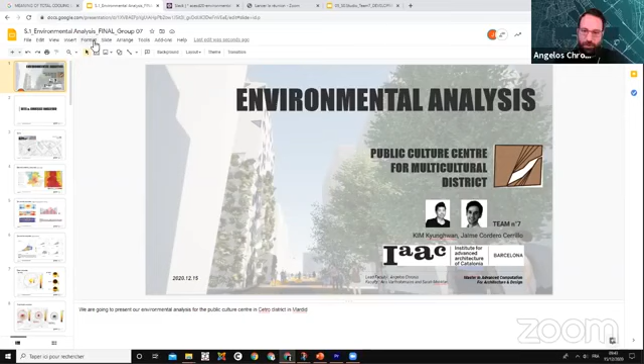Hi, so we are team 7, Kim and Jaime, and we are going to present the environmental analysis that we have done for designing a public center in Madrid.

This is our site, located in the city center of Madrid between La Latina and Lavapiés neighborhoods. As we already know, Madrid, like every other big city, has a problem with heat islands, which produce increasing temperatures. So this is something to be considered for our analysis and design.

We started doing a climatic analysis, and we could see that there is a really hot and dry summer and a slightly cold but quite humid winter. We also did some comfort analysis, which showed us that during all seasons there are some comfort days, summer having the most of them. But we saw that it would be really important to have a cooling system during that season.

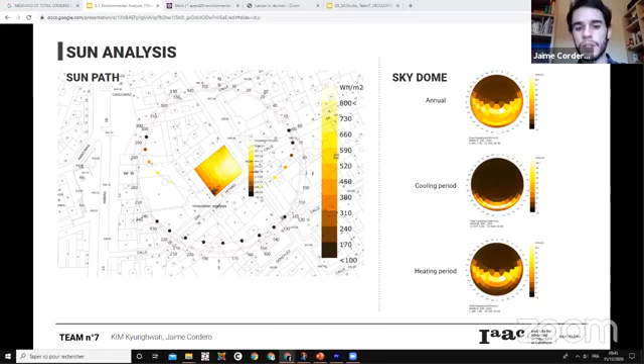With the radiation analysis, we saw that there is a quite proportional high radiation distribution on all our site, with the bottom left corner receiving a bit less radiation. That radiation comes mostly from direct radiation, as the site is facing southeast. Through this environmental analysis, we understood that our site receives high radiation, especially on the upper corner, and that radiation is an important factor to be considered in our design.

That's why we asked ourselves how solar analysis can define architectural building and facade design, and also interior comfort, within other key factors of conception.

To be able to answer this question and optimize our project, we used several tools. We started with PedSim, Ladybug and Honeybee, and Pachyderm or Snail for the analysis. Then we continued using Ladybug for optimizing radiation through Wallacei. And at the very end, also Ladybug and Honeybee for the facade design, for daylight and energy consumption analysis, and also as decision makers.

As we have seen, mainly the environmental problem we have to face is high radiation and high temperatures, and dry weather in summer, which we take as input parameters for our project, with sun direction, radiation, and building orientation.

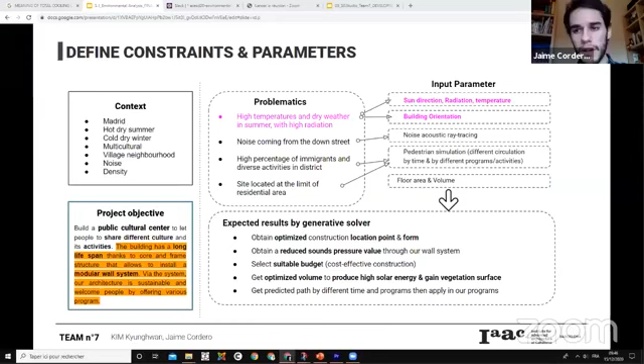Before the design and optimization phase, we did some initial mass studies through radiation and also energy consumption. And we saw that due to the shading one building could produce onto another, we didn't have such big values of cooling load.

So I'm going to present optimization and our strategy to combine data. We tested several optimizations. This is our final optimization based on our context and site analysis.

Our goal was to optimize the model with a maximized floor, and then minimize the radiation, along with other factors. So this is the result that we selected, which was on the average for all the fitness values. And this is how our final mass looks like.

With circulation in the middle, but also there is a small building on the street block for solar radiation, for a big building inside.

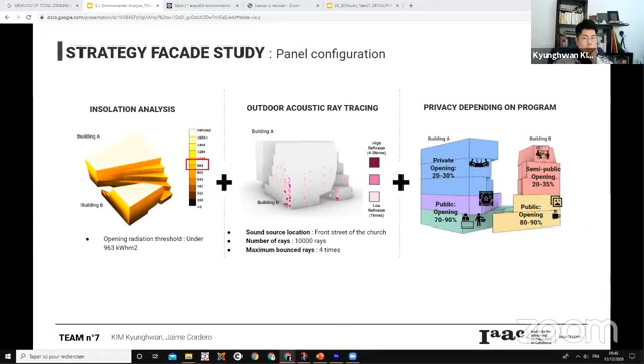The strategy for our facade design is that we use insolation analysis and acoustic ray tracing data, but we also gave openings by different percentages, depending on the program.

To explain our methodology to integrate all output data for facade design, we use the case of building A. With the triangle mesh model, also used for the solar radiation analysis, we tested to find out the radiation threshold for openings. We got a threshold of 60% of facade where it receives mid and high radiation, and 40% for mid-low radiation areas.

Then the second variation for opening and closed panels is related to program and privacy, as you can see in the blue and gray images. As the percent value is increased, more windows are created. For example, for closed panels, the higher percent we have, the fewer closed panels, for the ground and first floor, where the public spaces are.

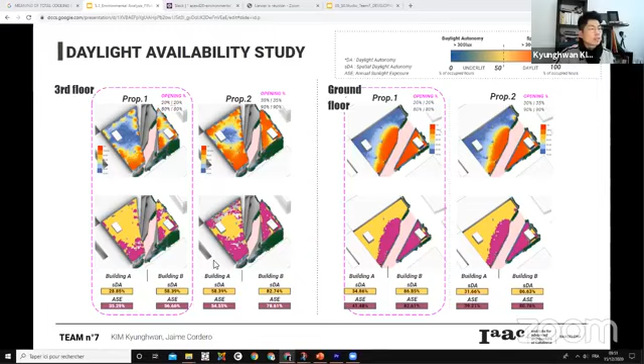And also we did an energy consumption test. The total cooling and heating load: the cooling load is less than proposition 2, so this is better than that one, but the total heating load is higher than proposition 2. So this is a little problematic in the end.

So we have to test our openings, and during the summer they have quite good daylight value. So this is the final view.

Unfortunately, we have a technical problem this morning, so the video hasn't finished yet.

Yeah, thank you. Thank you.

So, comments from the jury. Where do we start? I can't see raised hands and things like that, but we can see the video actually, not the environmental one.

Comments from the jury. You don't want me to pick names, so maybe you start. No one? Theodore, any comments? Yeah, I was just waiting to see if anyone would go first.

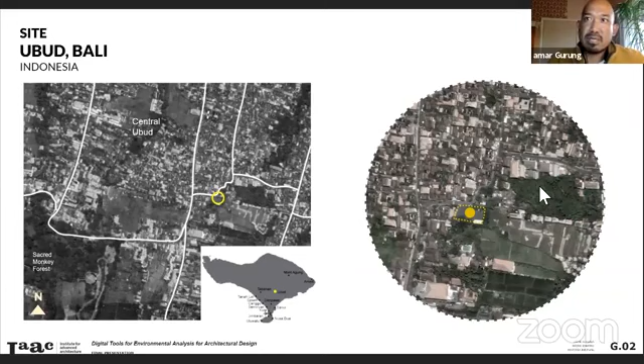Being located near the equator, Bali has a warm tropical climate with year-round temperatures averaging 27 degrees Celsius and a humidity level of about 85 to 90%. There are two seasons in Bali: the dry season between May and September, and the wet season between October and April.

The driest months are also the coolest months. Between January and March, winds coming from the west are powerful and gusty, whereas between June and September, winds from the east are consistent but not strong. Hence, this is also the kite flying season in Bali.

The difference in total radiation levels does not change much between the two seasons. Radiation levels remain consistent but high. Naturally, there is more diffused radiation in the wet season than the dry season. Similarly, the vertical angle of the sun does not change much between wet and dry months - the sun is mostly overhead all year round.

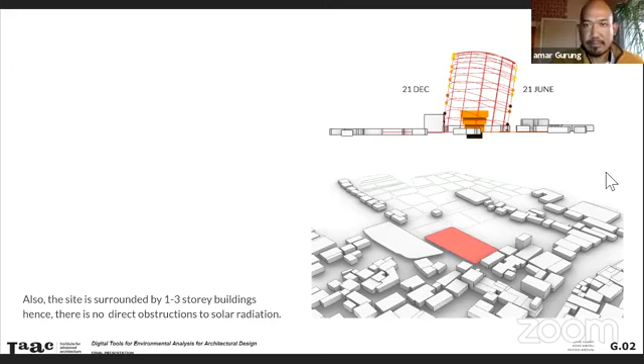The site we've chosen is surrounded mainly by small 1, 2, or 3-story buildings, so there is no direct obstruction to radiation on the site. In conclusion, there is high solar radiation all year round, so proper shading should be provided. Monsoon season has extremely high humidity, which creates discomfort especially when temperatures are also very high. There is a good amount of wind all year round, so it should be utilized for natural ventilation and stack effect.

We started with the research question: can we create opportunities from the climate by harvesting solar and wind energy from the environment, decreasing reliance on energy produced by fossil fuel, and at the same time create indoor and outdoor space that is comfortable?

Our objectives and methods are self-shading the building to reduce heat inside, creating openings that allow cross ventilation, determining how much solar energy can be harvested, and creating comfortable outdoor spaces sheltered from rain, wind, and sun.

We started with quick tests at the beginning of the course to see the position of the building and how the building affects the site, or how the site affects the building, regarding total radiation and different levels. Since there is no obstruction from the sun path on the site, we concluded that it does not affect the total radiation.

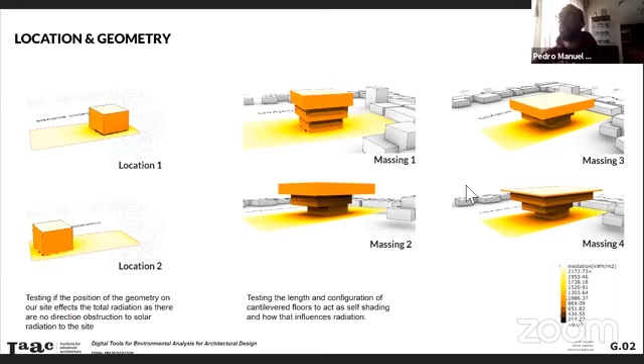The second test, shown more on the right, we started with a larger roof that can increase solar radiation on top to harvest sun energy, but also use staggered volumes to act as a self-shading device. Both worked well, so we decided to move forward with our final geometry concept.

We derived this geometry from Wallacei, giving three parameters: first, maximizing solar radiation on the upper surface to position solar panels; second, maximizing shading or self-shading; and third, maintaining a geometry of the volume.

We then went on to test different massing surfaces, asking ourselves two questions: can we optimize the mass for solar radiation without compromising the bamboo-related design? Because bamboo is the material we are going to use in this project based in Bali. And how much energy can that provide to the building?

We went through three steps: from the first test of Wallacei to the second test which gave us this edged geometry, then to the third one which we smoothened out to be suitable for bamboo construction. Looking at the numbers and other drivers of our project, like the bamboo construction, the numbers don't differ too much from Wallacei 1 to the smoothed Wallacei 2.

So we decided to have this sustainable material and to go on with this value of total radiation that we could achieve with Wallacei number 2. And then we started to look at the efficiency of a solar panel, which is 15 to 22% that we can have now.

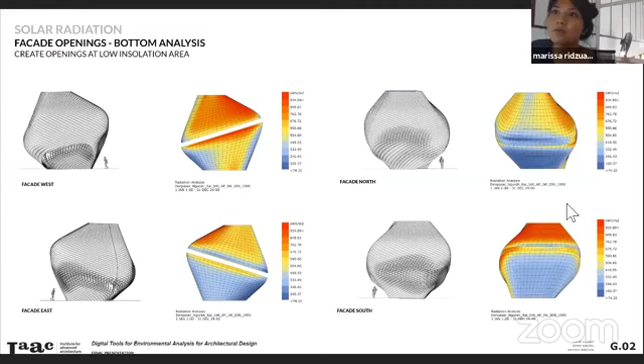And then we looked at it from top, and now we're looking at it from the bottom, which is mainly low insolation. And here we see that there's opportunities to create the openings for entry and for operable windows. That's how we derive where the location of openings are.

And then we looked at the skin design and these scales that we have on the building, testing different rotations and seeing if we can increase it even more.

So in the end, we went from this flat building skin to something that is angled for optimal insolation and also to create these openings. And we have achieved increased insolation.

And then we had a look at the cross ventilation. The east side of the building, the site has no adjacent building, so it gives a big amount of wind flow, and so that is a potential for cross ventilation. Whereas the west side that has 2 to 3 story buildings is protected quite considerably.

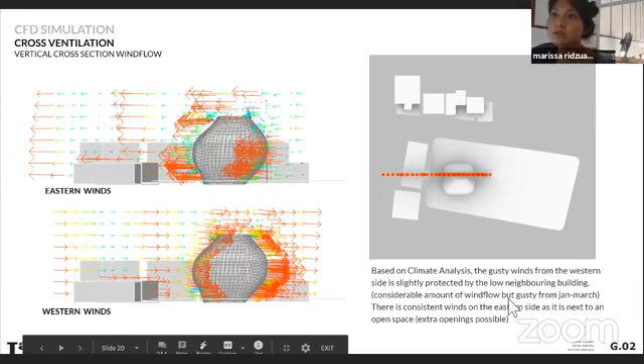There is consistent wind on the eastern side as it is next to an open space, so extra openings are also possible here.

And then we looked at aggregating. The intention of this aggregation is to create a courtyard that can be shared by these 3 buildings. So in aggregation 1, we managed to create a small courtyard of comfortable wind speed.

And then we tried aggregation 2, which has the module on the south side, using the existing building to shield on the north and west side. Aggregation 2 clearly provides a bigger area of comfortable wind flow in the courtyard area.

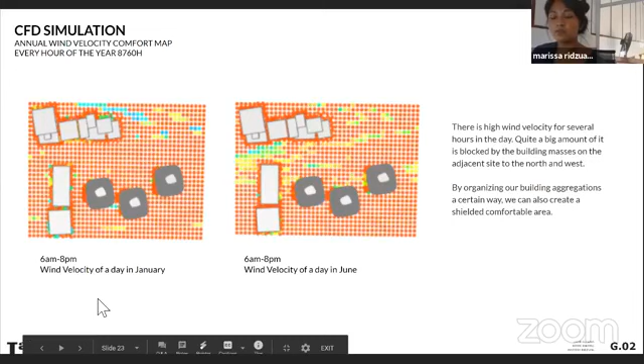And this is a simulation from 6 a.m. to 8 p.m. on 2 days, winter and summer solstice. By organizing our building aggregations in a certain way, we can create this shielded, comfortable area.

And then the solar adjusted temperature, the MRT, sun exposed versus sun shaded - obviously in a tropical country, sun exposed will be unbearable in the midday. And so we needed a strategy for the shading.

And so we looked at shadow studies, important times of the day, 8 a.m. to 6 p.m. on summer and winter solstice, and determined where we need to shade the area, which is in red. By doing the thermal comfort analysis of the average week of the year, we can confirm that we do need to really well shade this courtyard to create a comfortable open space.

And so our strategy for that is a very simple landscaping strategy, using big tropical trees such as the banyan tree in the areas where we need the most shading, and some other smaller canopy trees in the areas.

Yeah, and what do you want to talk about this one?

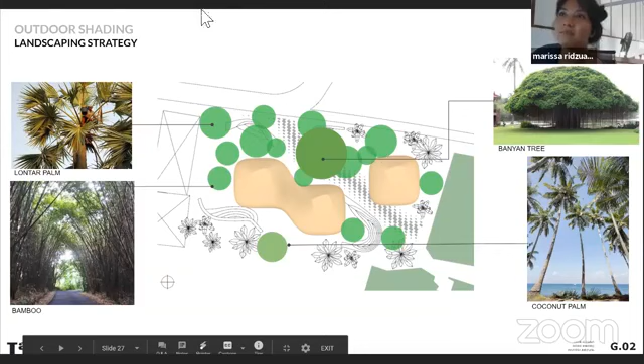Yep, and I think another consideration that we haven't really elaborated on was also the natural ventilation. So I think the form of our building is also well suited for stack effect to further enhance the natural ventilation within our building. This section also shows how that sort of works within our building.

And I think that's the end of our presentation. Thank you. And I just like to add a little bit to what Amar just said.

I think based off of a lot of our comments with the tutors, that this strategy of solar radiation will create a lot of heat, and it's only natural that we use it again to create that airflow across the building. So this is why we have this last slide to remind us that absorbing solar energy will also create heat, and we will have to find a way to solve that problem. Yeah, I think that's all.

Thank you, guys. I think you have to stop here because you're a little bit over time. So let's go to the jury for comments. Very briefly, it has to be a little bit briefer than before because the presentation ran over a little bit. Matilda, do you want to start? I have you first in the order, or anybody else, actually, it doesn't matter, don't worry.

I just had 2 points of reflection. Again, I'm probably the least technical jury here. So one of the things is actually something that I have from my experience in Indonesia, related to the luminosity. I know that in tropical climates, the light quality or the quality of light that you have is very different, for example, with respect to what I was used to in Australia. And so I was wondering if that is something, I saw you did a daylight analysis, but by the design, which is very sheltering, I was wondering if you had taken into account the possibility to analyze the quality of light within the building.

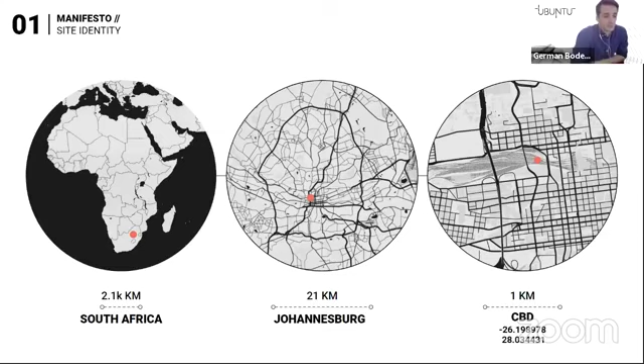Our site is located in the southern hemisphere, in South Africa, in the city of Johannesburg, more particularly in the CBD, the central business district. Something to notice about the CBD is that it's in a segregated city due to apartheid, and this particular site has been divided by a 75-year-old railway infrastructure, as you can see. On the right image, we got almost 30% open land, and that open land is not related to urban and green parks, but to how much the train occupies and creates, as you can see on the left image.

Now we'll pass on to my colleague Andrea to talk about the weather analysis. Thank you, German. After we ran several analyses, we learned that the temperature is very comfortable, relatively comfortable in Johannesburg all year round, and the change is not too visible or drastic throughout the year. I'd like to remind you that summer is winter in Johannesburg and vice versa. We also ran some humidity analysis and saw that it's comfortably dry. The most humid month is February, and we have a dry period from June to July. Overall it's quite comfortable all year round, and the average yearly cool comfort factor is 0.417, which is very close to 0, the optimal comfort.

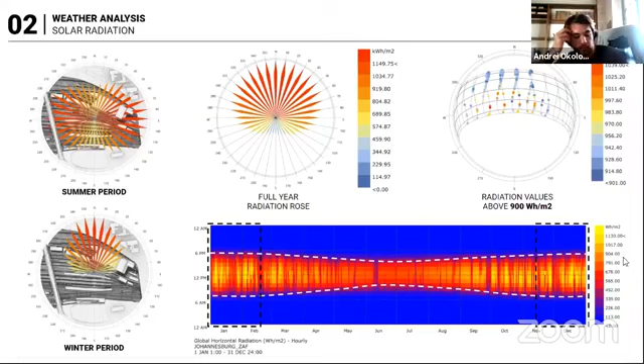On a more important note, solar radiation is a factor we had to consider more, as you'll see in the next slide. Especially in summer, when radiation numbers reach up to 1,000 watts per square meter. In the next slide you can see we've done some macro analysis of solar radiation, and considering that our site is an open field of rails, it receives more than 13 hours of sun a day, considering there's no shade.

I'll pass it back to German to talk about the design process. As a conclusion to the analysis, we understood that both radiation and wind are factors we need to use when considering how we design the bridge and how we connect it. So we then started a design process: a pedestrian bridge that connects north and south. What we did is take all the selected sites and identify the interstitial voids along the railways, which we can actually use to place our supports.

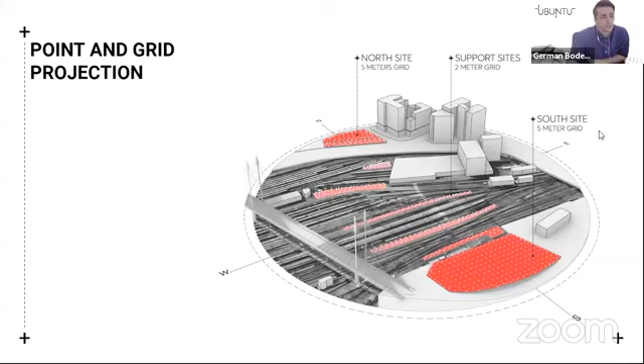We then cast up grids of points, and using a genetic optimization algorithm, we started looking for the optimized path connection. We used 4 different goals.

The first goal is to reduce the travel distance in order to create the quickest connection between A to B. Goals 2 and 3, we analyzed both the entry and exit slope in order to create a wheelchair and bike-friendly route.

4th and most importantly, in each iteration we measured the amount of radiation in order to choose the one that absorbs the least amount. This then takes us to a final solution.

For the final solution, we did further analysis and testing on both sun hours and radiation. As we expected, we can see a huge amount of radiation on the bridge that spans north and south. We got an average of up to 12 hours on the bridge.

So we also further analyzed both winter and summer. In winter, our average sun hours decreased, but in summer, based on Johannesburg at 1,600 meters above sea level, these values and hours for radiation are extremely harmful for the skin.

So the question for us was how can we create a pedestrian bridge that grows a protective skin on the areas we want to host program. This bridge hosts particular programs on the area highlighted, as you can see on the top right image.

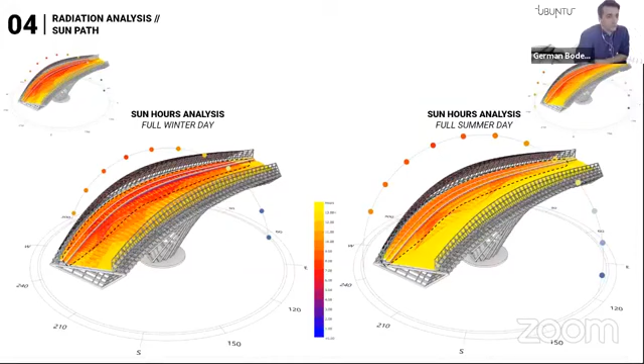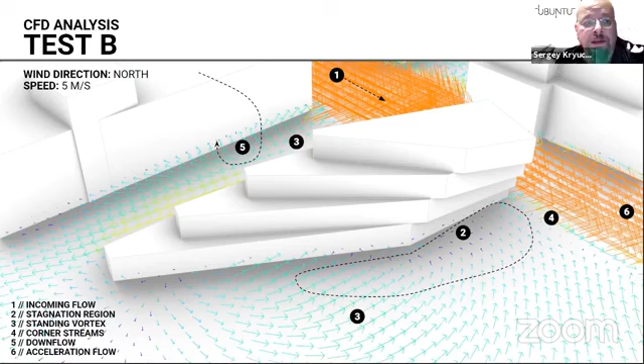There is a bigger scale simulation where we see the calm zone, so we located our leg wrapping around it so that we could create a kind of urban plaza next to it. And here it is with the actual bridge model.

The location of the bridge and its orientation from north to south, which did help us in terms of wind, also makes it not exactly comfortable in terms of sun, because we can protect it only from one side, which solves only part of the problem.

To improve the situation, we planted a few trees in the middle of the bridge, but only in those spots where we have the leg, because obviously we can't plant trees along the whole span of the bridge. With all the design constraints, this is what we arrived at.

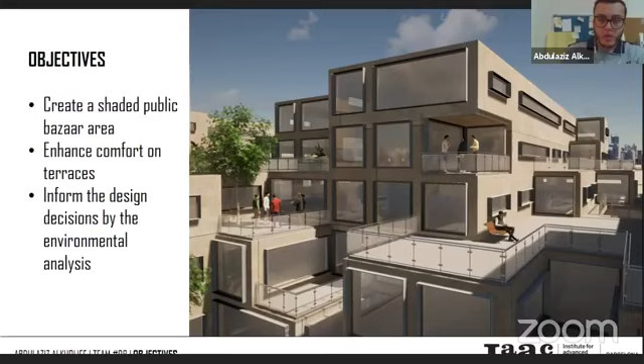My objectives are to create a shaded public bazaar area and enhance comfort on terraces for the students there, and inform the design decisions by the environmental analysis, as will be shown in the next slides.

First of all, we have the chart of the hourly dry bulb temperature. I'm trying to see the hottest period in our climate, that exceeds more than 30 degrees, showing 38% of all the year above 30 degrees.

Now for the wind, same strategy to show the wind speed, showing 80% of the year less than 5 meters per second. The third parameter is humidity, so I'm trying to find the amount above 20% per year in Riyadh, which gets a result of 43% for all the year.

Now I'm trying to find, per the hottest period, which is between May and September, and again between 8 a.m. up to 8 p.m., when I combine some factors or influences like temperature, wind, or humidity. It shows that when temperature exceeds 30 degrees and wind speed is less than 5 meters per second, it's 27% per year.

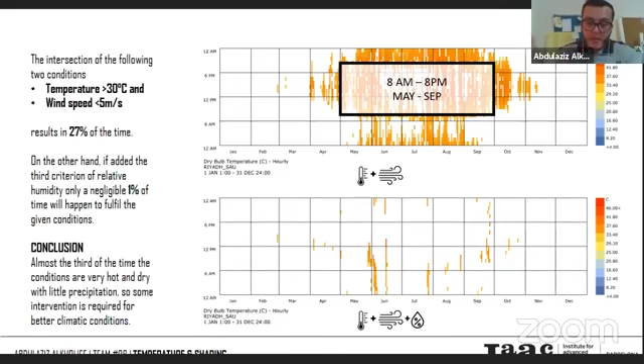So I want to focus on that, because it's a coffee shop, and I want to try to explore and find a solution there. I focus there and try to add shades to explore. I'm not really sure if it's possible or useful.

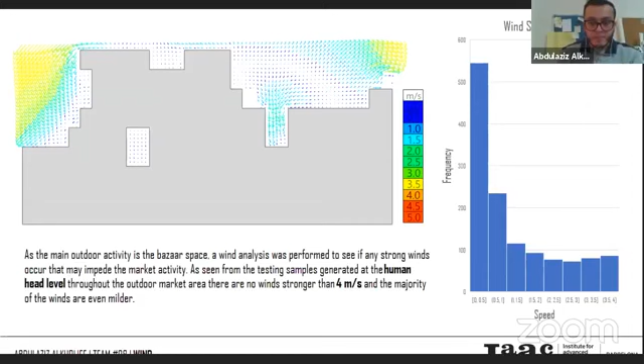Now I'm trying to show the wind races through the terraces and capsules in my building, and it shows the same result, mostly in the domain between 0 and 0.5, but nothing more than 4 meters per second.

These are my activities or zone categories in the building. Depending on the activities, I change the pattern of the capsules or their sizes, and generate the openings for all of them. Now it becomes the same, let's say, offset.

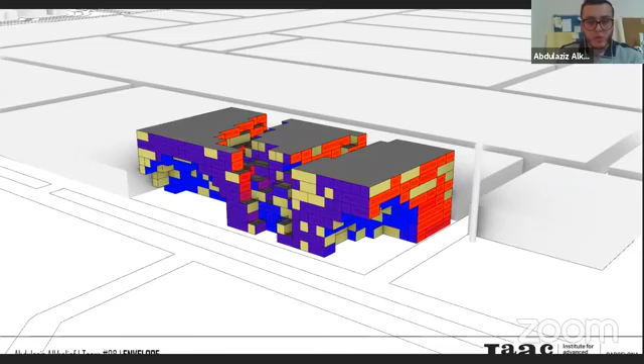Now I just see again that the sunlight becomes with my faces, and we notice that the purple one which is in the north side, and the blue one which is already shaded by the cantilevered floors, it's become blue. On the other hand, in the west side, it's become red, or let's say some of them become maroon. Depending on that, it's become an inverse relationship between the faces and the sun rays on our facades.

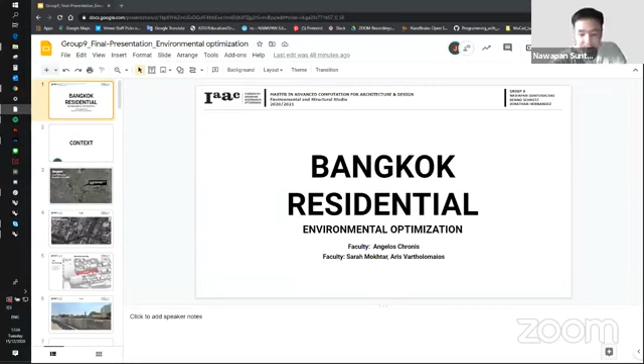We are group number 9: Nawapan, Jonathan, and me, Benno. We're presenting a Bangkok residential project today, meaning the program is residential.

We found a plot. It's a large plot for a residential program, 135 by 73 meters.

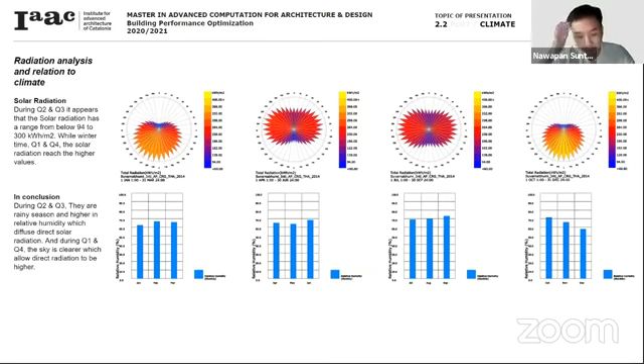Related to the season, the interesting thing is that during the winter time there is more radiation than in the summer. This is because of the cloud density, which we can see on the humidity bar below. We guess that during the rainy season, it could help diffuse the direct sunlight and solar radiation from the sky.

According to the relative humidity, around three-quarters of the year, from January to October, wind direction mostly flows from the south side, which brings humidity from the sea—this is known as the summer monsoon. Meanwhile, during the last period of the year, the wind moves from the north or the mountain part, bringing cooler air called the winter monsoon.

Another issue is the flooding problem. The common period of flooding is between September and October, at the end of the summer monsoon and rainy season. Also, the direction of the sun makes a major impact on increasing air temperature and the heat island effect.

The more perpendicular the angle is, the more the temperature increases. Unlike European cities, Bangkok is a tropical country where people normally avoid facing directly into the sunlight—it could easily burn human skin within an hour. So living under a shading area would be a suggestion, and this issue will be developed further in our design principle.

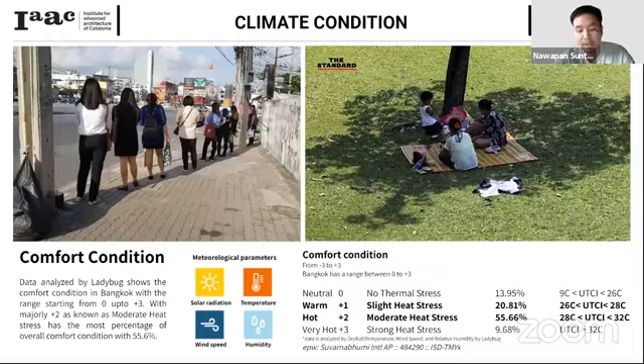For architecture and engineering, we investigated how the climate relates to social activity, and found that 30% of housing energy consumption comes from air conditioning operation. As one of the densest cities, Bangkok doesn't have many parks or forests to reduce the heat island effect—so to say, 90% of buildings need air conditioning to cool down the interior air temperature.

So we would like to propose a strategy to help reduce temperature and protect the building, according to the data we have. With the idea of a passive cooling strategy, Thai vernacular architecture will be our model role for our case study. We thought perhaps we could turn our problem into an opportunity to design a strategy mainly focusing on passive cooling. We expect the goal will achieve results including temperature reduction, less solar radiation, and maximized ventilation with a passive system.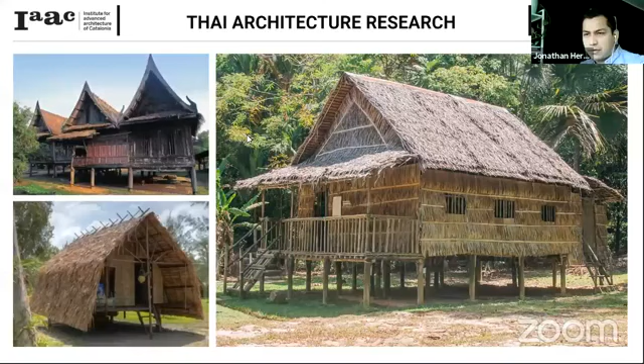And Jonathan will continue on this. So we try to extract the main principles from the vernacular architecture. And next, we'll see the most important principles.

If we start from the ground level, there's this principle to elevate the building in order to increase ventilation. We have external shading systems, a jetted roof, and a slope roof in order to increase the cross ventilation. We also have a timber structure and bamboo for cladding.

So we had the question how to integrate these principles into our design. For our form optimization, we tried to include all of them, but we started with the regulation. We set a parameter of 6 meters to set back, then we set a parameter for the height limit of 24 meters.

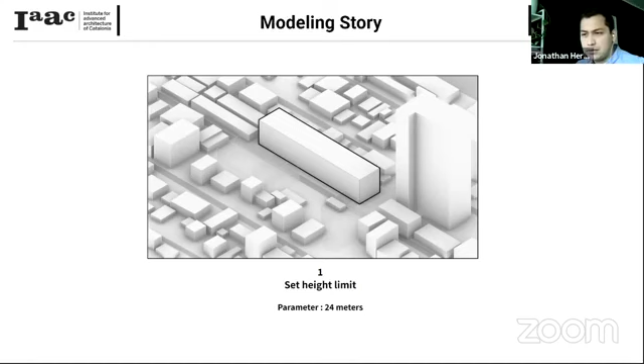Then we use this box-in-box concept to insert a volume inside in order to have an external skin, to increase the ventilation, and we also set back the ground facade to avoid the direct sun and to create self-shading.

And we opened the ground floor, from the vernacular architecture strategy, in order to have this cross ventilation. And we integrated 3 different vertical atriums in order to make the airflow through the building, through the common areas and the corridors. We created a roof slope strategy and oriented this roof towards the wind direction from the south.

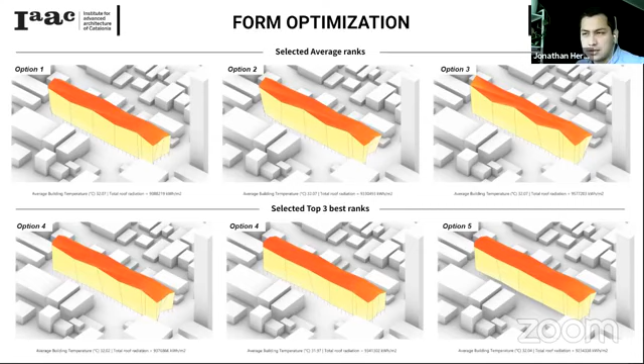The result is an integrated wind strategy in the building. We ran our optimization process with Wallacei and selected the average options and the top best.

We have here a comparison between our best 6 options, and we took number 5 since it has the lowest inner temperature and the lowest roof solar radiation.

And what we managed to do was decrease the temperature of the building. The typical mean building surface temperature in Bangkok is around 35 degrees Celsius, and we reduced it to around 31.97 degrees. After we got the results, we started wondering how we can design and define the location of the opening on the facade, and what would be an input for our data.

So in this stage, we start thinking about how we can locate and create the opening on the facade. So we look at the wind pressure on the facade surface to see where is the most possibility of the wind to flow or enter through the building.

We mapped out 8 directions of possible wind that create pressure on the facade surfaces. To use this data, we overlaid the wind pressure of 8 different directions and implemented a pattern of openings according to the pressure value happening on the facade, where the max pressure in red are the most opening area, and the minimum pressure in blue will be the least opening.

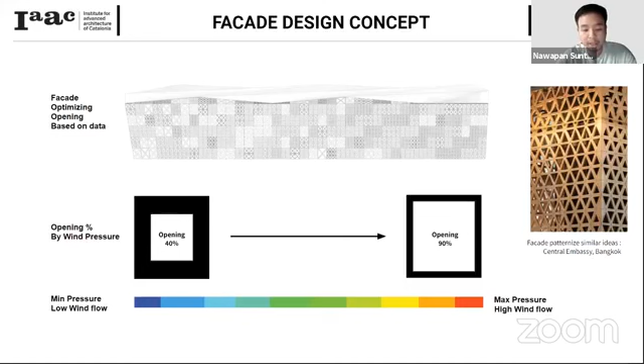And also solar radiation will take part as a self-shading strategy. That is to say, the solar radiation will subdivide the diagrid to increase the self-shading system, and the wind pressure will minimize and maximize facade opening, which we set according to the daylight factor.

We analyzed the overall facade for daylight factor to understand how we can set the minimum opening requirement for our facade to provide sufficient light. We found that with 40% openings, the interior space will have a daylight factor between 4 and 5, which means during the day the indoor space doesn't need to use artificial light.

In parallel, the section diagram shows the cross ventilation from the southeast to the northwest, where the indoor hot air can flow up to the roof through the porosity of the atrium structure before moving out of the building. This is measuring the result of our strategy and the facade radiation.

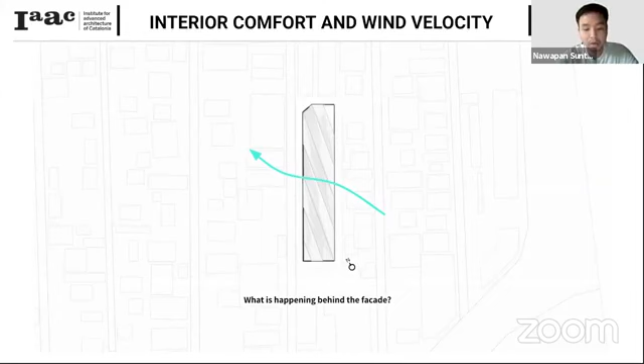And lastly, we are questioning what is happening behind the facade. So in order to consider cross ventilation and how the wind has an impact inside the indoor space, we look at the wind speed on the empty floor and analyze the area where it could achieve comfort according to the Lawson criteria. We found that the indoor space has different values in different directions as wind flows through the facade.

And we end up with a strategy about using the wind velocity behavior to define the program within the space. We believe this data will help improve our design in terms of programs and circulation in further process.

So as a conclusion, we have achieved 3 optimal results, including reduced building temperature, created cross ventilation, and apart from simulation, we succeeded in using structural elements with carbon neutral based material.

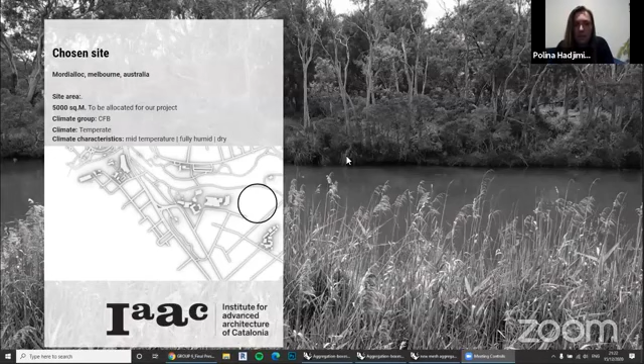Our project is located in a residential area, suburban residential area in Melbourne. It is close to a park and a river, and our closest neighbors are a campus of a college and primary school, and a lot of residential housing development. So our program is basically fitting in the context. We are doing residential apartments, and we also have a commercial part. So it's a mixed-use building.

Our commercial part will be a cafe, and because we wanted it to be automated with a lot of robots, we've allowed for quite a big back of house or service area. So the main concept of the building is to be a link for the neighborhood with the park. We wanted to create some sort of inviting volume that people can go through so that they can reach the park.

In terms of aims, we wanted to explore prefab and create a modular system driven by one core part that can work both horizontally and vertically, with modules that can work both horizontally and vertically. We've used structural optimization to define those parts, and we also wanted to optimize for solar gains.

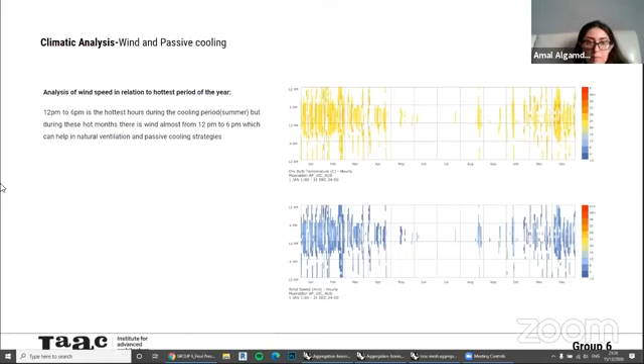It's changing the slide. I'll be changing the slides, just tell me. Amal, can you hear us? Yes, continue. So basically, we generated the wind diagrams to look at where the winds are coming to our site.

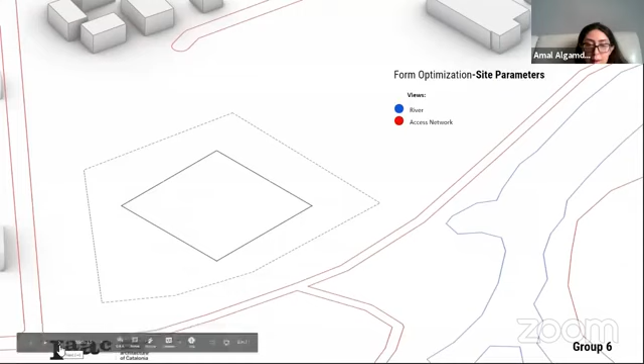So basically, for form optimization, we started with buildable area based on regulation, 40% of total land area. Then we constrained our volume based on site parameters. The height limit is 15, according to adjacent building average.

So we used voxelization and we used linear attractor to populate our volume. Our voxel size is 3 by 6. This is the module that we are testing.

In iteration 1, we had direct sunlight to our building and no self-shading. So we decided to change the linear attractor rules and rotate our building. In iteration 2, we have less direct sunlight and more self-shading.

Based on our access points, we wanted to define our ground floor plan, and we uplifted for cross ventilation and wind flow. That also affected our interior circulation and vertical atrium for vertical ventilation.

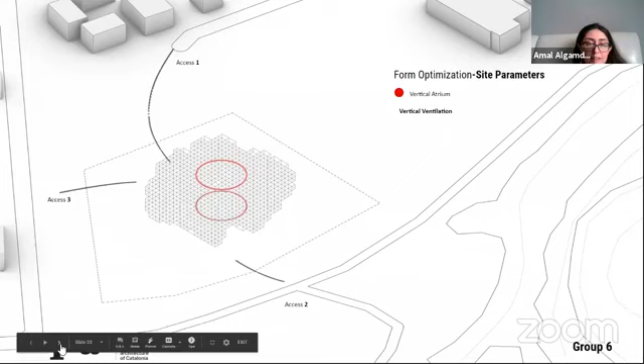So this is our optimized volume. And this is our program, where we have the commercial, residential, and services at the back where we don't need that much sun.

For solar radiation analysis, we have done an annual study in heating and cooling. We noticed that we have minimized the roof surfaces and minimized the direct solar radiation. But there is also potential for generating energy from our roof by integrating solar panel systems on the roof.

So basically, as a modular system, we decided to focus on a cluster on the north facade where the solar radiation is the most. From that, we generated our daylight strategy. We have the variables, which are opening specifications and locations, and the orientation and stacking of our modules.

So basically, at the beginning, we ran a floor plan analysis. In the first scenario, we see a fully glazed analysis. In scenario 2, we have a solid wall. And in scenario 3, we tried testing opening sizes and shading systems with double glazed panels.

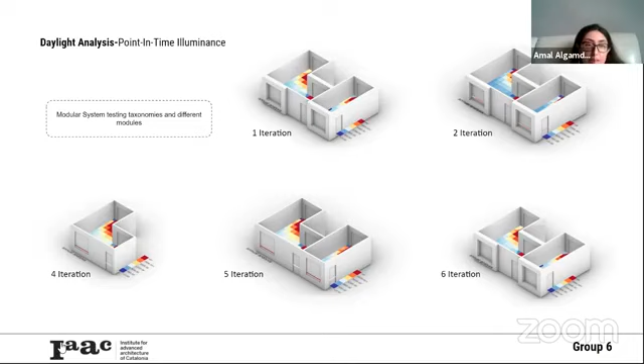So then we started looking at, since we have a modular system, we wanted to test taxonomies and different modules. Actually, we wanted to look for spatial daylight autonomy and annual sunlight exposure.

We have a modular system, so we tested two modules that are stacked, and openings are created from both sides. One side is covered with a shading system of louvers, and we took the glare into consideration. From that analysis, we realized that we have deep modules, 3 by 6 meters depth, and we need to have openings from only one side.

We wanted to maximize the daylight with large openings, but also minimize the glare. We were also considering how these modules are stacked and placed together. Our shading system louvers proved to be useful in our strategy.

Going back to the volume, we did some initial optimization of the actual volume and learned the hard way that using modules that were not final was not the right approach.

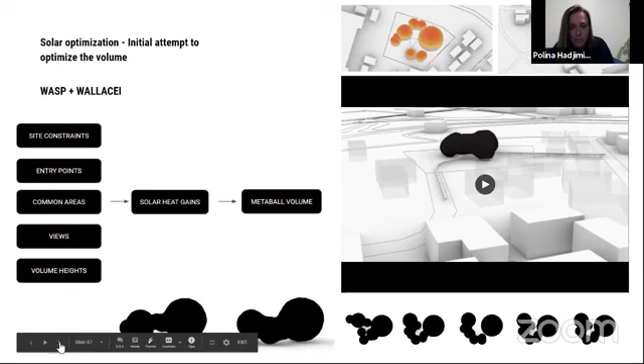In the second round of optimizations, we had the volume defined, and we ran the optimization against two criteria: maximum volume area and minimum solar radiation during the cooling or hot period, from 11 to 3 p.m., so that we can achieve a reduction in the need for cooling.

We found that sometimes this optimization isn't applicable because when it reduces the area, it's no longer comparable, which we are working to fix by optimizing with the number of modules instead. But anyway, that gave us a good range of options to compare, and we could see which architectural options we liked, how they worked, and how they compared to a larger range of options.

So we chose one option, the one shown below here. In terms of radiation, we got a 28% reduction of solar radiation because of the optimization, in comparison to the initial volume we had designed.

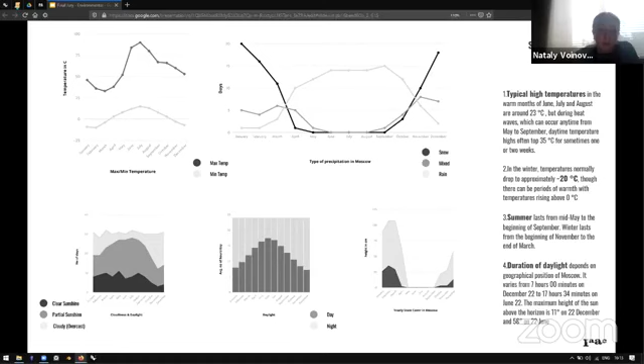In winter, temperature normally drops to approximately -20, though there can be periods of warmth with temperatures rising above 0, and colds when it reaches -35. Duration of daylight varies from 7 hours in December to 17.5 hours in June.

The site of the community space is located in the historical center of Moscow, at the junction of New Arbat Street and the Boulevard Ring. The urban void on the corner is the footprint of a historical building demolished in 1994. The wide and straight New Arbat Street, cutting through the historical development, has created an obstacle to pedestrian circulation and at the same time opened the space to the winds. These diagrams show the correlation between climate limits and our design workflow.

We run simulations to explore the limits and possibilities of our site plot. Environmental fitness objectives for the form finding include maximizing flat roof to create a public lifted garden with nice viewpoints, and collect rainwater for the vegetation.

Minimizing north facade to reduce the heat loss in the building. Reducing building shadows on the surrounding buildings. Maximize the ground canopy to create a shaded space for pedestrians.

We use the result of the simulation as a boundary box where the constraints we took into account define the basic shape of our design.

After that, we focused on the 3 main components for our building: the light wells, the skin, and the semi-outdoor plaza. Our proposal addressed the challenges of designing a building in the contrasting Moscow climate, where one needs to protect from the direct sun and glare.

For that purpose, we have introduced dynamic fabric screens, which can react to the sun and wind. Also, by creating vegetation on the upper level, we aim to reduce the heat gain in summer and contribute to solving issues like the urban heat island affecting the city of Moscow.

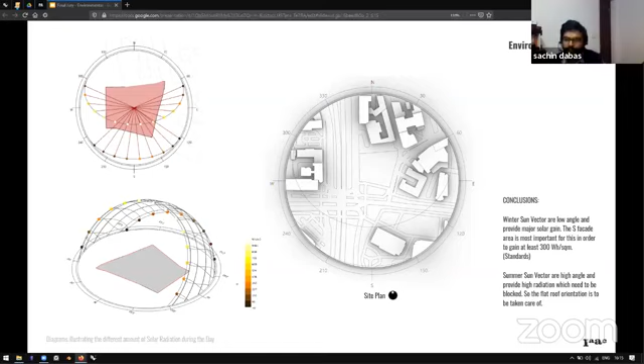Site analysis: we observed through our studies that due to the low angle of sun in winter, there's a major solar gain, while in summer there's a high angle of sun that provides high radiation which needs to be blocked. We observed through our analysis that the daily temperature is maximum between June to August and minimum between December to February.

The climatic study charts helped us understand the diverse range in temperature and the diurnal variation between the heating and cooling periods. The daylight analysis showed us that the proposal needs to look into optimizing both the solar and daylight gain.

The wind analysis showed us that the site is open to winds from all directions, which is a serious issue in winter as well as in summer.

We studied psychrometric charts for the site, and we observed that passive solar heating and capturing heat gain can aid in improving comfort at our site by about 40%.

Other strategies like evaporative cooling help us to a small extent in the cooling period. These help the design improve comfort percentage from 40 to 45%.

Now, methods. We then started looking into what methods can be used to optimize the design. We looked into 4 major methods: evolutionary form finding that defined our geometry, environment analysis, daylight analysis, and CFD analysis, which address various aspects of the design.

Various simulations were performed incorporating the environmental parameters to help derive the final form. First, we have a list of research studies that helped us define the design objectives for the building which we want to optimize.

The first one, a research on solar envelope, was done to derive the initial volume and the required insolation value for comfortable solar gain, which helped set a baseline.

Then, to develop the building footprint from the site in order to create a public space, the insolation area on site and the immediate site fabric was looked into.

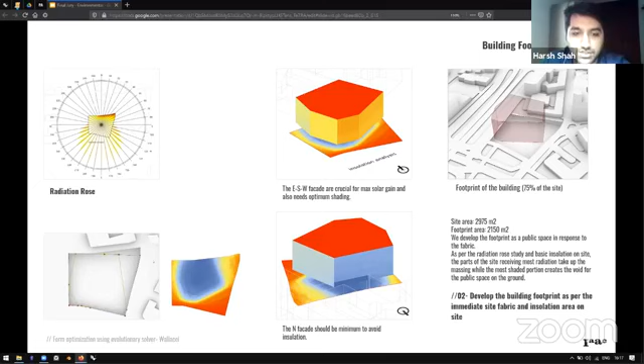Further, the base building floor plate area was defined as per the facade to avoid heat loss, and the orientation was determined by the maximum radiation angles of the sun.

The facade was developed by attaining maximum solar gain from low-angle sun in the heating period, and a negative slope was created as self-shading on the east, southern, and western facades.

Thus, the floor plate areas were also defined as per the horizontal shading factor of the latitude. Further, for the cooling period, the maximum high-angle sun helps to define the roof area, which is also used to collect rainwater.

Another aspect is understanding the casting of shadows on the site and the context and the form, which should be minimized as per the bylaws.

So based on the environmental studies, these were the fitness objectives: reducing the heat loss in the building by minimizing the northern facade, and reducing building shadows on the surrounding buildings as per the bylaws of Moscow.

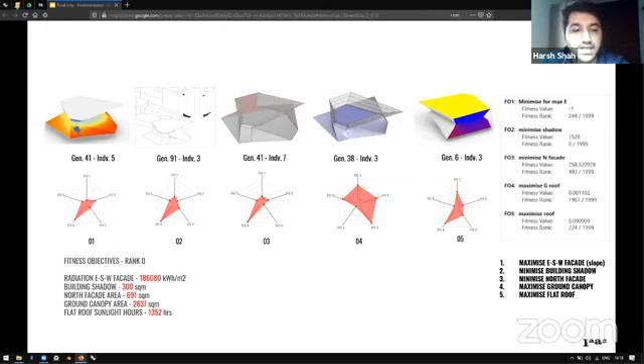In order to create a shaded space for pedestrians, we introduce a fitness objective of maximizing the ground canopy, maximizing a flat roof for creating the negative slope for building self-shading, and maximizing the other facades for solar gains. It's important to note that first, the best options of each fitness objective were studied to define baseline values that helped us gauge the final selections, as well as prioritize the fitness objectives in relation to each other and the context.

These are the final prioritized fitness objectives and the 5 best variants which were chosen by comparison. After several attempts and closely testing variations with climatic analysis, we observed variant 1 works the best. The final optimized massing was reassessed with the environmental studies, and it was noted how in the cooling period, the self-shading helps block high-angle sun, and in the heating period, the roof and the east, southern, and west facades help in solar gain. Now we would look into the results in conclusion.

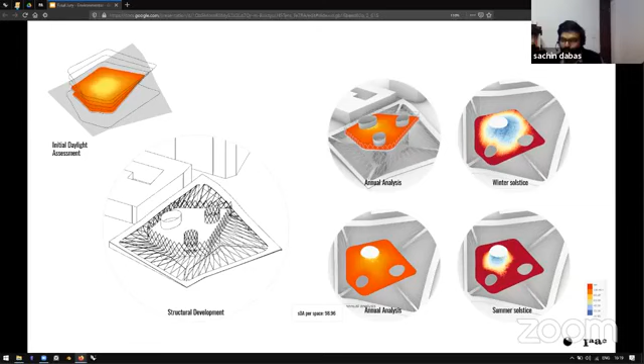The 3 optimized components of our building that were result of our studies were the light wells, skin, and semi-indoor plaza. The introduction of 2 light wells in the building instead of 1 came from our initial studies. This intervention not only improved the daylight in the building, but became the structure that supports the floors and follows the same principle of the facade, bringing the structural elements inside.

We studied the wind patterns around our site and also in the vertical sections, and observed the average speed of 1 meter per second around the building, which is suitable for sitting for long periods as per the standards. At certain times of the year, the speed varies both in the summer and cold period. Hence, concluding from our climatic analysis, we decided to wrap the building in a skin of structural timber.

An important aspect of our proposal includes creating a public plaza on the ground and lower level. It extends its canopy for protection from rain and snow. After mapping the pedestrian movement around our site, we ran a few simulations and created a seamless pedestrian movement, crossing in diagonal motion and cutting the urban plaza on the lower level into smaller parts.

We ran a few simulations for winter and summer winds, using data from our previous environmental analysis. We observed these variable winds form a pattern around our building. Hence, we can see the variations of wind more closely to our context, which wasn't possible with windrose diagrams.

The timber frames are flexible and use textile screens as a material, which is one of the recent innovations that could not only protect from the wind and sun, but also help in cleaning smog particles in the air, since they have a filter for nitrogen oxides.

This is the view from inside the semi-indoor space on the ground level, benefiting from the self-shading of the building. It provides shade not only to the pedestrians, but also creates a covered public forum for urban activities that is missing in Moscow today. Movable textile screens can be controlled to open and close as per different wind conditions.

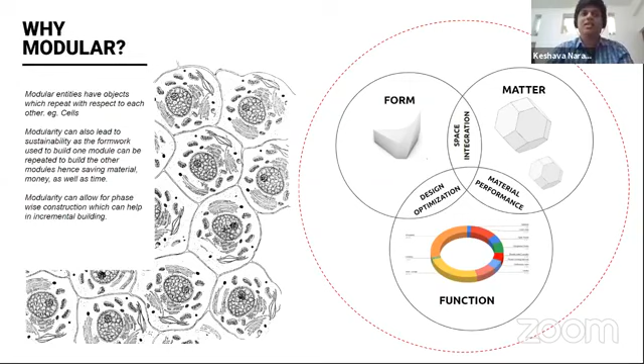So our project is divided into 6 parts. The first part is the site analysis. The site is located in Mumbai, on the western coast, in between 2 main roads and the rail track. The site is very accessible by road and rail, and the nearest railway station is about 5 minutes walk from the site. The site lies between the commercial and industrial parts of the city.

Then we went on to understand the environmental aspects of our site. Most of the radiation is incident from the south, and the predominant wind sources from the west. Wind is very critical to the site as it is very humid and lies on the coast, so cross ventilation is necessary. The temperature is actually very high throughout the year, almost above 30 degrees Celsius, and the high radiation period is from October to April.

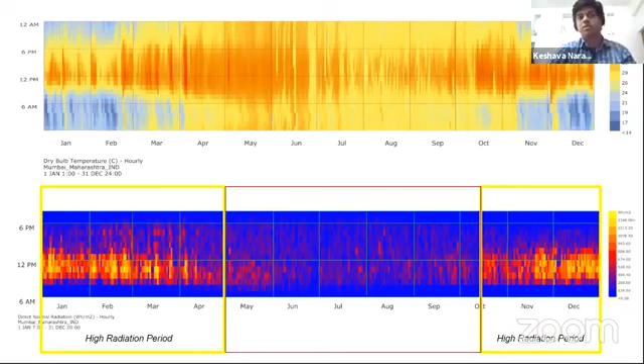So we wanted to address the lack of public spaces in Mumbai. One of our intentions was to integrate pedestrian movement into the site and create a public pathway generating activity and providing retail functions supporting it.

So based on these understandings, we did a basic thermal comfort analysis. Keshu, can you go to the next slide? Can you see? No? Yeah, sorry about that.

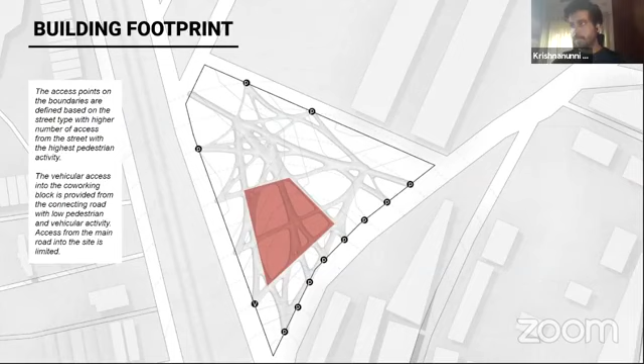We combine these with the existing potential and pedestrian activity of the roads surrounding the site to develop this network of paths, which further makes these smooth walkways through the site. From these paths, the left out larger areas form the initial footprint of the building, which is then further optimized.

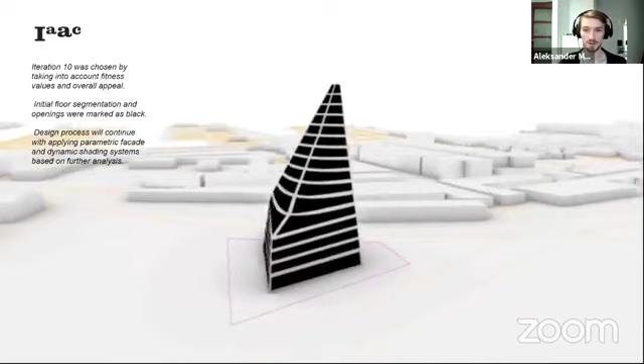Then we went on to develop our form further based on this form, and to understand the programmatic potential of the site. So then we took the program of a co-working space, because as I showed earlier, the site was in between the commercial and industrial parts of the city.

We went on to formulate the different programmatic requirements, which are open desk, shared pods, private meeting rooms, conference rooms, and a library. We divided them.

We developed modules based on the octahedron, because octahedrons interlock into each other better, and they give us structural rigidity. So then, based on these octahedrons, we developed 3 types of modules: small, medium, and large, based on the programmatic requirements. This is just a view of a smaller composition.

So we had the form, which was given to us by the environmental optimization. Then we had the material, which is these timber modules, these octahedrons, and then the function, which is the co-working space. So then we wanted to find how to unite these 3 parts.

So then we resorted to aggregating these octahedron modules to form the function of our building. This is the final aggregation shell that we further took on to do further environmental analysis on our building.

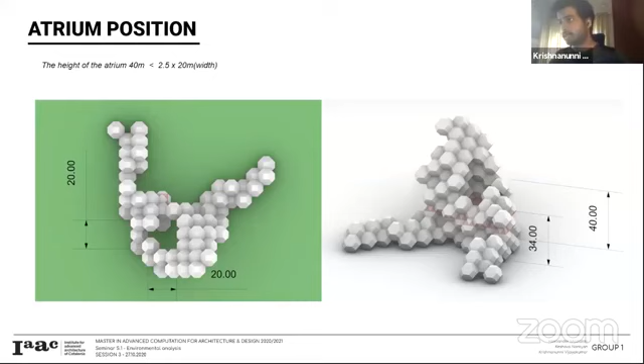Based on the structure analysis, we then took the form and positioned an atrium into the building, and the size of the atrium is actually determined by its relation to the height, allowing daylight into the interiors. So then we went forward and did the daylight analysis, and we started with considering the exterior walls as fully glazed panels.

We showed that this outcome was not going to be positive, and as expected, it was not. Although 100% of the floor area received more light than the required luminance value, about 78% of this received about 1000 lux for more than 250 occupied hours, which is way higher than desirable and not really inhabitable.

So then we looked at various patterns of opaque and glazed panels to see which options would allow us a more desired level of illuminance. The first pattern reduced the amount of floor space receiving 300 lux luminance to about 80%, but has a reduced annual sunlight exposure of about 40%, lower than before but still much higher than desired. Then we went ahead with the second pattern, with the glazing reduced to just 2 panels.

Here we observed that the space received desired daylighting illuminance reduced further to 76%, but the glare is now reduced to 32.5%. Another step we took was to increase the glazing in the atrium walls, which further increased the daylight availability to 90%, with a relatively lesser increase in sun exposure.

Even with this, we were not at the solution we were looking for, but the values indicated that the direction we took leads to finding a balance between desired daylight and reduced glare. So we concluded that we need a further level of diffusing of the facade panels to reduce the glare but maintain available daylight. We looked into radiation analysis to inform this further subdivision of the panels, which Alex will explain.

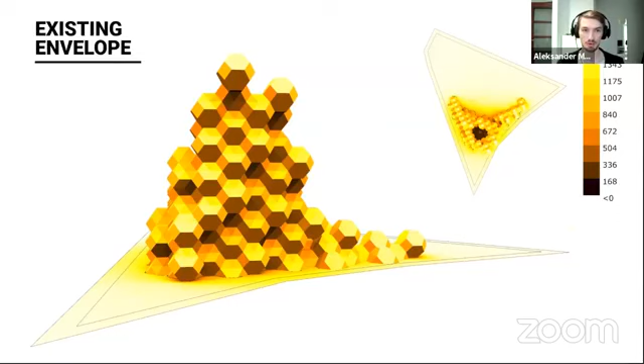So then we went on and analyzed our whole building facade based on yearly radiation to inform where we actually need to put an external envelope to decrease sun exposure for the interior of our building. The second aspect was to promote the wind, but I'll talk about that later. So then we chose around 60% of the most radiated panels as a place to place our facade panels.

Then we developed a system for the active shading and active wind inflow panels. So then we placed the panels, and developed the active system based on sensors, which changes throughout the day, and also supports the natural ventilation that can be used during the night hours when the wind is colder, promoting natural ventilation.

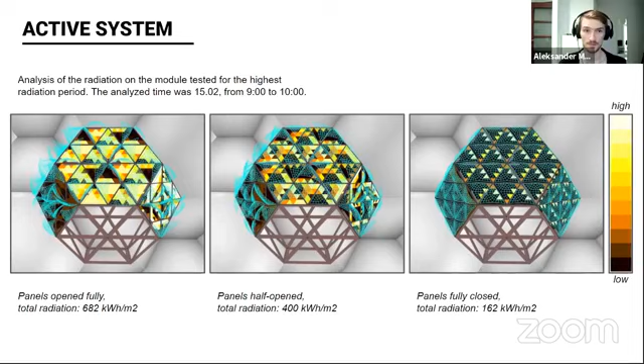Just a quick analysis on how opening and closing of the facade increases and decreases the radiation intake of our building. Then we decided to do a post-design analysis on the building with CFD, because Mumbai is a very windy city with an average speed of about 10 miles per hour, and we used Lawson's criteria for wind safety.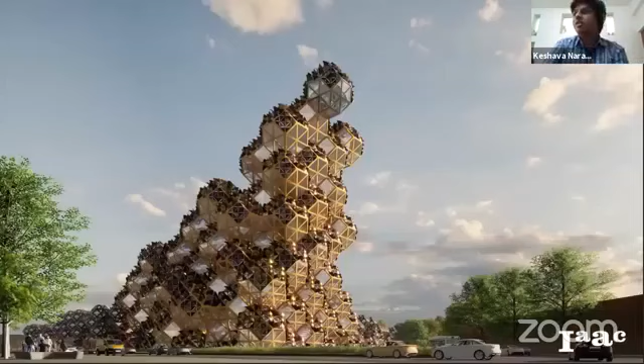These are some renders that show the interior character of the building and how the volumes can be inhabited, and these are the exterior ones. Thank you, thanks guys.

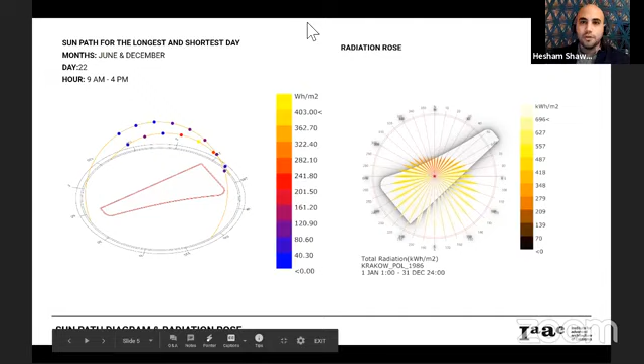Our project is located in Krakow, Poland. One second please. So first, we looked at why the presentation is moving that fast. I will give up control, Felipe, and you can control the presentation, because it's moving too fast.

Our presentation content starts from the climate conditions and the problems we are going to address, the plans configuration analysis and building orientations, preferred scheme daylighting analysis. Number 6 is glazing ratio definition, number 7 is facade iterations, and number 8, next steps to do.

Our location is inside Krakow, Poland, and our climate is a warm, humid climate. The summer period is from May to August, and the winter period is from December to January.

We can see our sun diagram, which shows the lowest and highest angles of sun during winter and summer, and the sky dome that shows the solar radiation from different directions, from the lower and highest angles of sun.

We checked the diffuse solar radiation to check which months we are going to face high solar radiation or high sun angle radiation for our building.

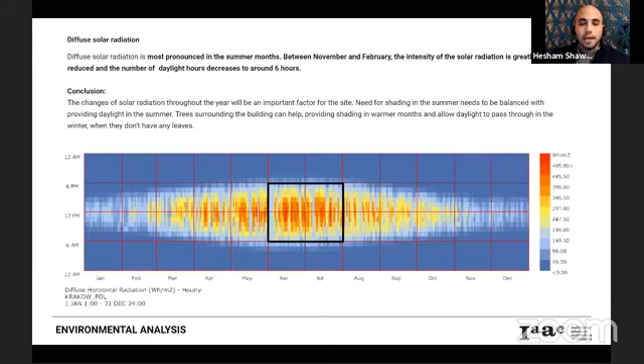Then we started to study the wind direction inside our site from different directions, and the most prevailing wind comes from the west direction.

After doing that analysis, we decided to focus on our main issues: first, to maximize daylighting inside our building, which is a residential building in Krakow, Poland; then to minimize the potential heat gains that will happen inside the space. Of course, versus that, we will have problems during winter for heating loads, so when we maximize daylighting and openings, we will have issues related to heating loads, so we are going to try to minimize it. Last, to create outdoor spaces.

That is the setup for our model. Our geometry has a floor area of 750 square meters, number of floors are 6, and built-up area of 4,500. We're using CLT materials and double pane, low-E glazing with a transmittance of 6%.

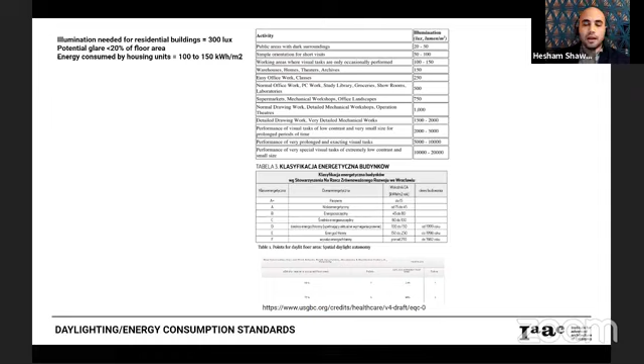And we also looked for the general standards and specific standards for Poland. Basically we need illuminance around 300 lux, and potential glare should be less than 20% of the floor area. Usually housing units in Poland consume from 100 to 150 kilowatt hours per meter square.

So first we started to focus on the daylighting inside our building. We started with a very base case that shows the building with 6 floors, and we analyzed the daylighting inside the 3rd floor to check the SDA factor, and here we have 36% SDA factor.

In the next slide, we want to increase the SDA value, so we introduced an atrium in the middle of the building. Now we have 61.3% SDA. We also wanted to check the ground floor to see the effect of the atrium on the least floor with sunlight going through the atrium, and here the SDA value equals 43.5%.

And then we wanted to do two things: first, to create outdoor spaces for people inside the units, and then again move units to the outside to catch more daylighting and have better distribution inside our atrium. So here we have an SDA factor equal to 52%.

In the next slide, we have a comparison between the 3 proposals. The first one, without any interventions at the atrium or shifting units, gives an SDA factor of 36%. After adding the courtyard, we have 61.3%. And after that, the shifted floor gives an SDA factor equal to 52%.

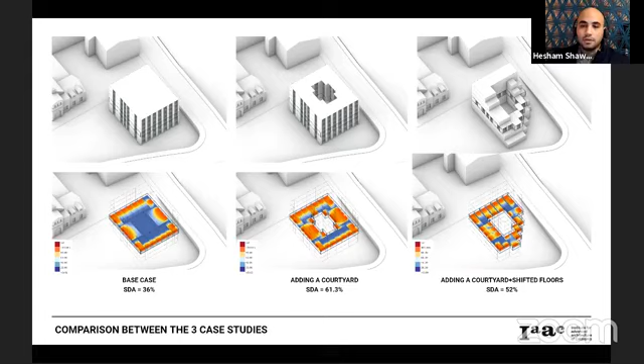That's it. So then we started looking at different building orientations, and we did the same analysis at the ground floor, considering it's the level that gets less solar access. We looked at the east-west orientation, analyzed all the different values for north and south orientation, and then had a third orientation, which was the east orientation.

So in concluding that section, we compared all 3 orientations and concluded that we wanted to continue forward with the east orientation, which gave us a total SDA of 78% and ASE of 39%.

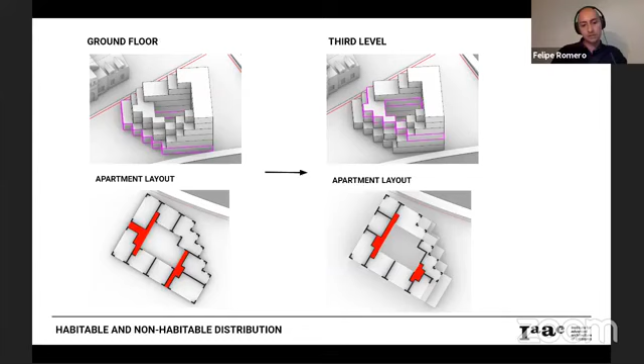Then after that, we took that preferred scheme and ran the same data analysis. We started looking at the different location of floors and units, doing the analysis for the ground floor and the 3rd level. We also started defining the habitable and non-habitable distribution of the building.

We ran the same analysis in June and December, and spatial daylight autonomy as well as the annual sunlight exposure for the ground floor. Then we did the same analysis for the 3rd floor.

At the end, we compared the worst case scenario, which was the ground floor for us, against the option where we didn't have any courtyard. What we get from there is that although we pick the option where the values are increased, we think we should take that to the next step and define the glazing ratio and the facade iterations.

Yes, so the next problem that we wanted to address was energy analysis. The next slide will show the setup for our analysis.

Our first baseline was the fully glazed facade. So on the next slide, we performed energy analysis for the fully glazed facade and looked at the spatial daylight autonomy as well as the ASE.

Looking at the energy balance chart, you can see that in winter we have quite high heating loads, mostly due to glazing conduction. In the summer, the cooling loads are not very high, so we're not much concerned about cooling, but we want to reduce the energy loss in winter.

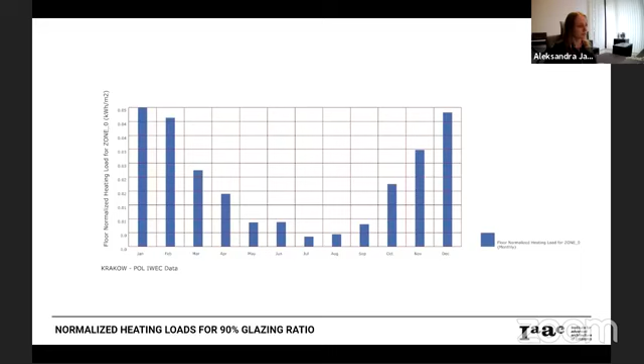The next slide will show the heating loads for this 90% glazing ratio. So then we started reducing the amount of glazing, first to 50%. The next slide shows how the heating loads reduced by 25%, but at the same time the daylight autonomy didn't change much, and we reduced ASE by 12%.

Our next step was to further reduce the glazing ratio to 30% on the west, north, and east facades, but we kept 50% on the south to catch more heat gains. In this case, we further reduced the heating loads by 30%.

Then we showed the full analysis for the whole building, and we were able to reduce the heating loads. Next, we looked at the energy, the surface temperature, and the energy balance again, to see that we were able to reduce the glazing conduction ratios.

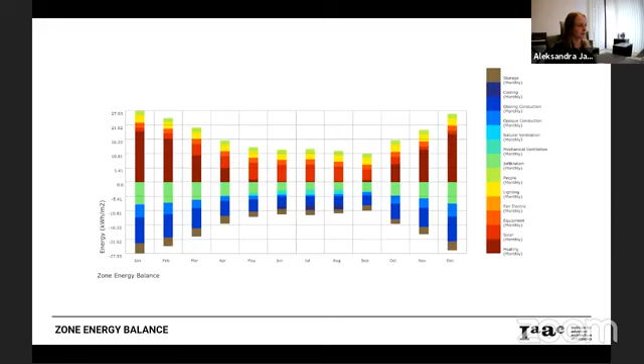So the next thing that we looked at was different conclusions: we were able to reduce the heating loads, and the daylight autonomy was not much changed, but we were still seeing a lot of direct sunlight. So the next thing we wanted to address was reducing glare, and we tried different facade iterations.

So our first iteration started with the glazing ratio from energy analysis, and then we started adding louvers. We had them both uniformly distributed and variably distributed. We tried three different scenarios: one without louvers, one with varying louvers, and one with uniform louvers. On the next slide we'll show the performance of each option.

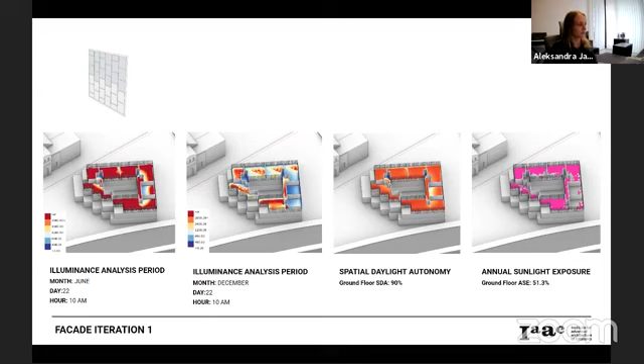So this would be the first iteration, and we can go through the second and the third, and we will have the comparison slide next.

So our next steps: we thought we need to reconsider the massing design to control the glare, and we'd also like more time to explore different wall ratios and provide maybe a dynamic facade option. Another area of interest would be to look at the thermal comfort zone for our outdoor spaces and further optimize the building orientation, massing, and whole energy simulation for the building. And that's all, thank you.